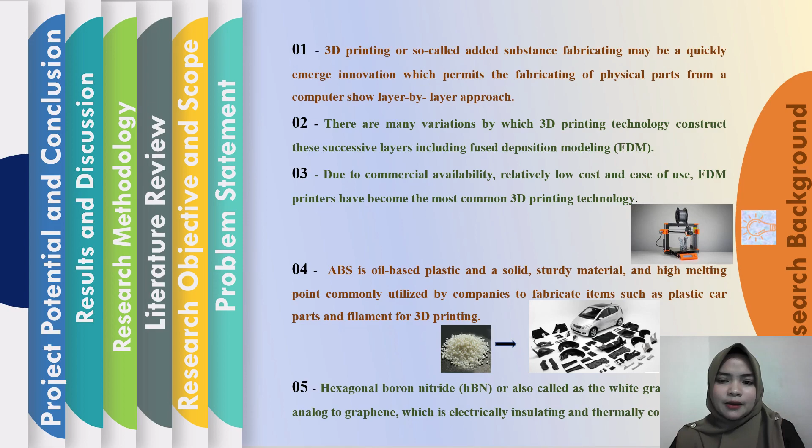Proceeding to the problem statement. For my first problem statement, the warpage issue arises since the primary layer does not adhere well and is peeled away from the printing stage in 3D printing. This is due to the poor adherence of the first layer to the printing platform, according to the previous study from Nazan 2017.

For the second problem statement, there is a challenge in fabricating the composite 3D printing filament, supported by the previous study from Zhang 2017, which found hexagonal boron nitride has high thermal conductivity and non-toxic characterization. From Devaki 2019, acetone should therefore be added to achieve the objective in ABS HBN composite.

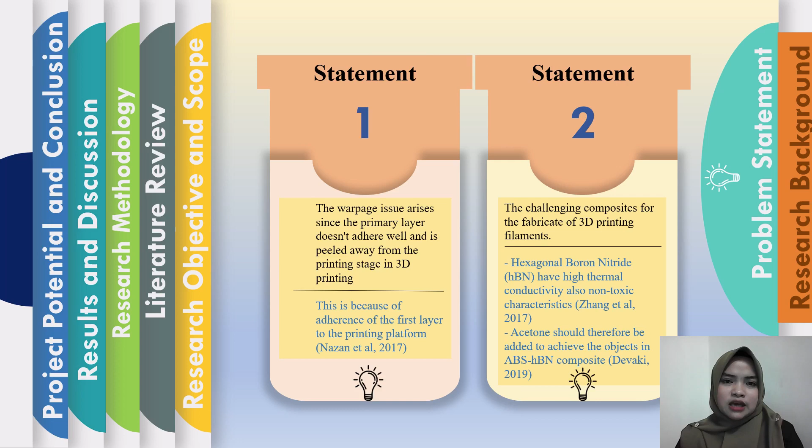For the research objectives and scope, my first objective is to study the effect of material properties of ABS HBN composite and pure ABS on the rheology properties of ABS HBN composite and pure ABS. The second objective is to study the effect of extrusion parameters and material properties on the microstructure of the extruded ABS HBN and pure ABS filament.

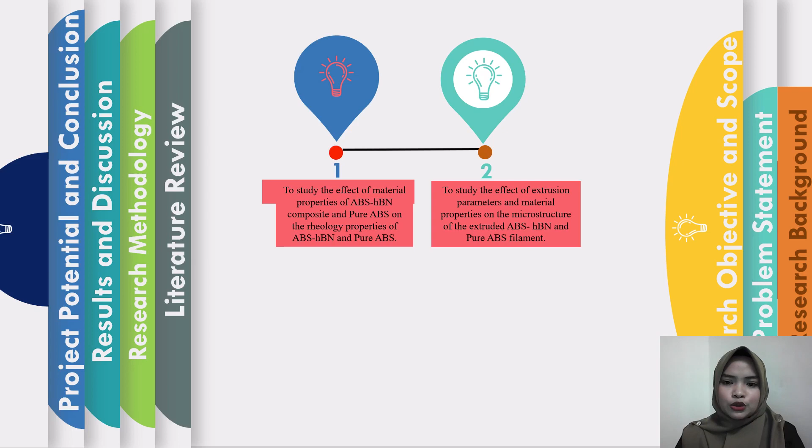For the research scope, this consists of rheology testing and analysis, where the capillary rheometer testing provides us a plot of viscosity versus shear rate and pressure. We also consider several parameters such as load, pressure, and displacement using the test machine to study the effect of extrusion parameters on ABS HBN and pure ABS filament.

This project will deal with the process of polymer filament extrusion, where the molten polymer is pushed into a shaped die through the use of pressure.

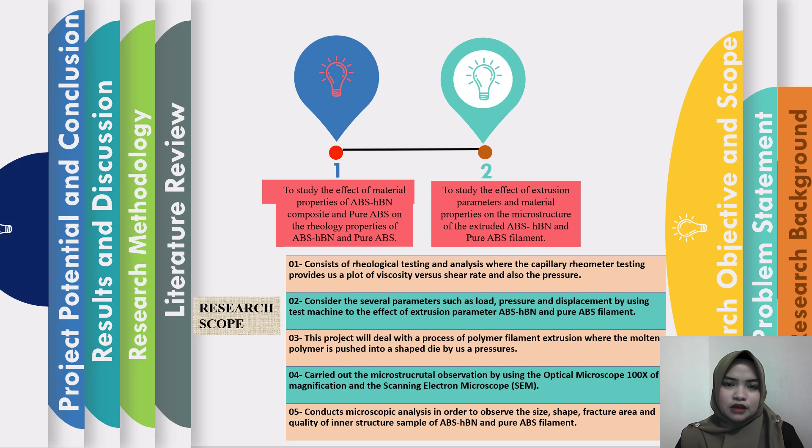We then carry out microstructure observation using two types of microscopy: first, optical microscope with 100x magnification, and also scanning electron microscope (SEM). Then we conduct microscope analysis in order to observe the size, shape, fracture area, and quality of the inner structure of the ABS HBN composite and pure ABS samples.

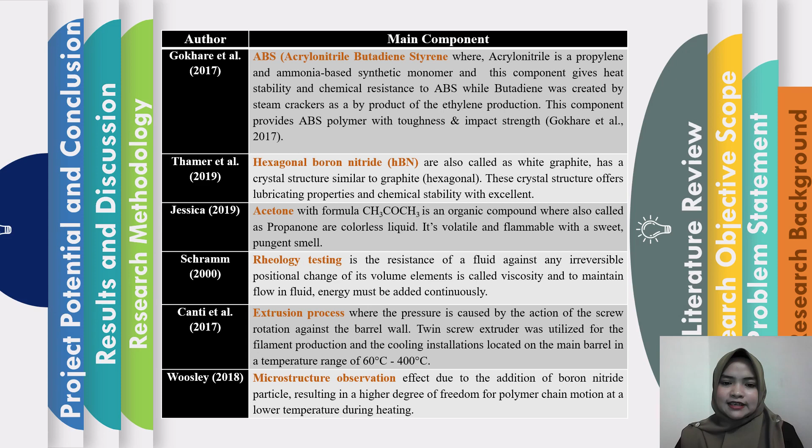For my literature review, I focus more on the main components, which are ABS, hexagonal boron nitride, acetone, rheology testing, extrusion process, and microstructure observation.

For the research methodology, we go through the flowchart of the project, materials, and process first. This is my flowchart of the project, which consists of two objectives that I will bring up next.

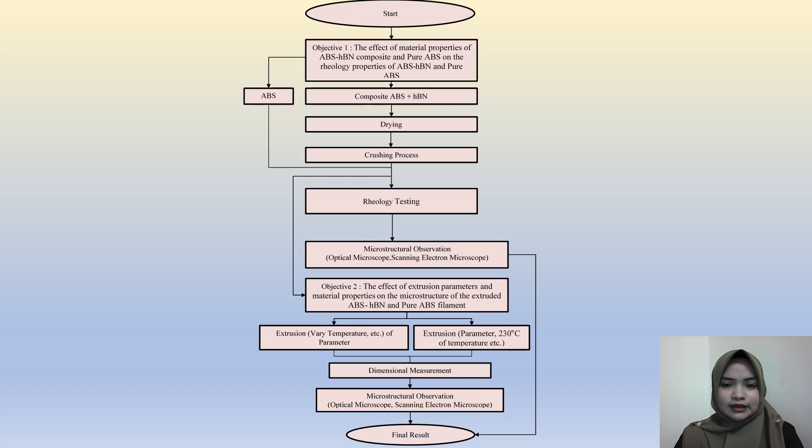For the material, ABS was selected for composite manufacture, especially for creating plastic products such as 3D printing, automotive construction, and electronics, which are important industries for ABS. This is referred from the previous study by Gokhare 2017. ABS will also be dissolved into liquid form, as referenced from the previous study by Devaki 2019.

ABS material is very durable, slightly flexible, and lightweight, which makes it perfect and easily extruded for 3D printing, and suggested printing at 210 to 240 degrees Celsius with an 80 degrees Celsius or higher heated bed. This is from findings by Zachary Hay 2019. ABS is particularly useful for objects requiring flexibility and strong self-bonding among layers, based on Horne 2017.

Refer to Table 6.1. This shows the properties and specifications of ABS resin, with ABS resin data from the CES EduPack software.

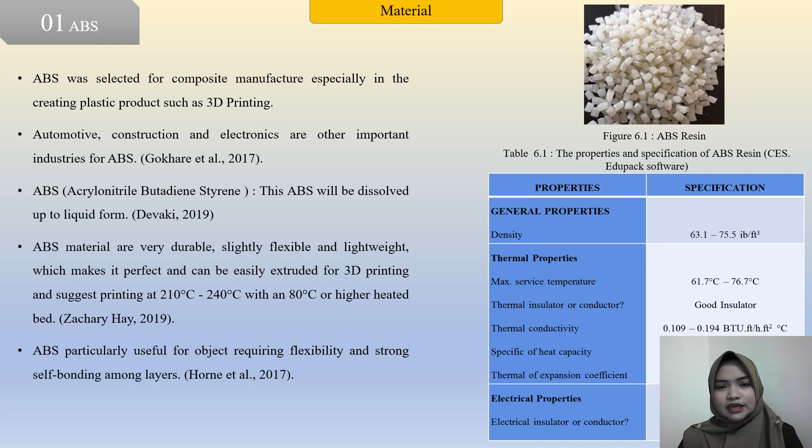That is hexagonal boron nitride, also called white graphite, which has a crystal structure similar to graphite hexagonal. This crystal structure offers lubricating properties and chemical stability with excellent characteristics, from the previous study Thamer 2019. HBN was selected in the manufacture of this composite.

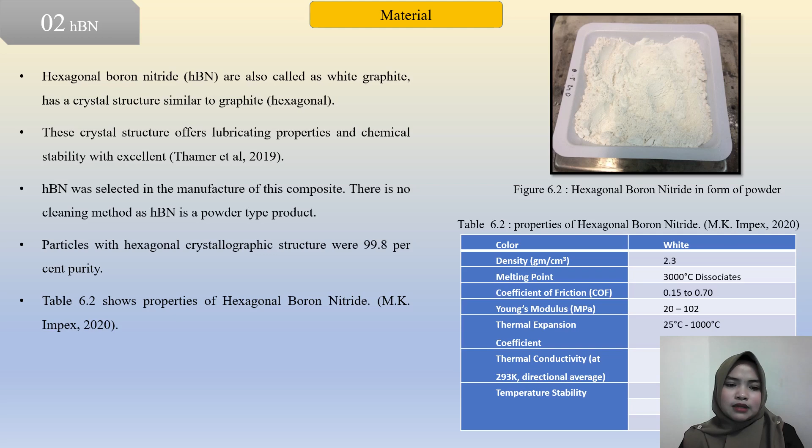There is no cleaning method for HBN because it is in powder form. Particles with hexagonal crystallographic structure were 99.8% purity. Table 6.2 shows properties of hexagonal boron nitride from MK Impex 2020.

Acetone, also identified as CH3COCH3, is a flammable liquid category. Acetone is water miscible and is also a major solvent, usually used for cleaning purposes. But in this project we use acetone as the mixture with ABS HBN to make a strong bonding between that composite. It is volatile and flammable, due to Jessica 2019.

Acetone can also be used to a limited extent for the formulation of nail polish removers and household items like cosmetic and personal care products. Table 6.2 shows physical and chemical properties of acetone from Merck's 2018.

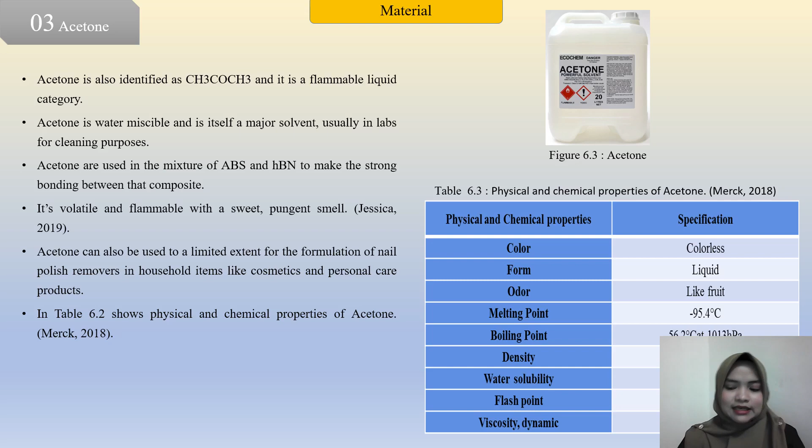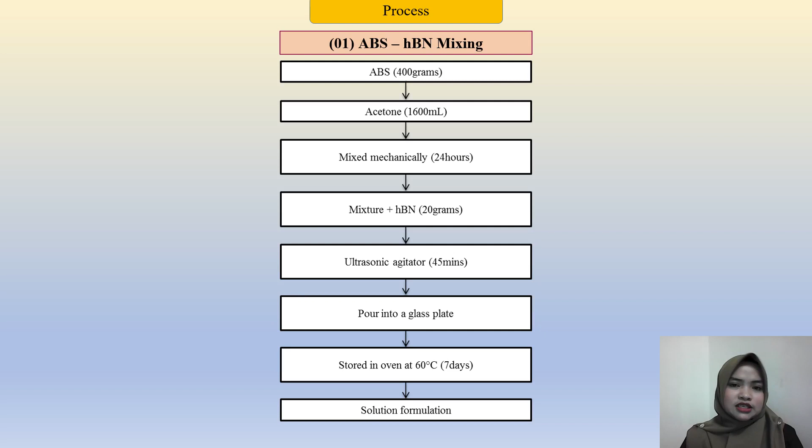Now we proceed to the process. First is ABS HBN mixing. Start with the combination of ABS with acetone, mixed mechanically for about 24 hours, and mix with HBN at 20 grams, then goes to the ultrasonic agitator for about 45 minutes, then pour into a glass plate and store in the oven at about 60 degrees Celsius for 7 days to become a solution formulation.

Then process number 2 is producing the filament of pure ABS and composite ABS-HBN through rheology testing. First, turn on the machine, set the parameters, and wait for the temperature. The parameters set are: barrel diameter about 50 mm, capillary length about 20 mm, temperature set at 230 degrees Celsius, and preheating time at 300 seconds.

After setting the parameters and temperature as desired, we insert the material and run the process, observing the graph and data variation on the computer. When the filament is successfully produced, the graph will show the data as stated in the pictures, with the graph line in green. The green line shows the filament produced from the machine, and then lastly we collect the filament product.

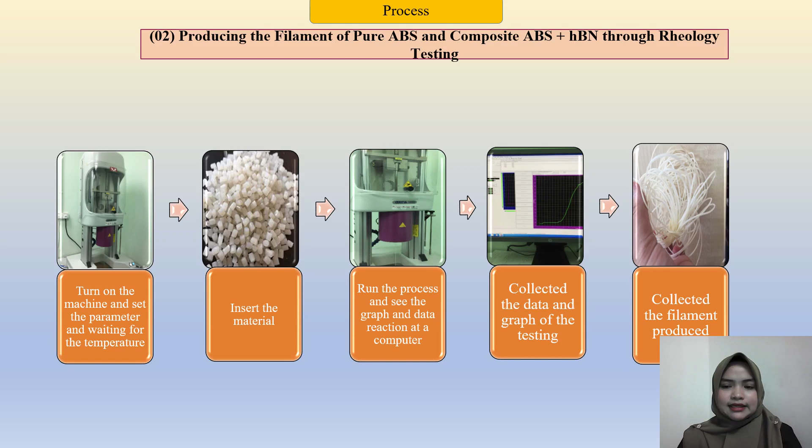Then we proceed to producing the filament of pure ABS composite and ABS HBN through another process: turn on machine number 1, set the parameters and temperature. The temperature set consists of 5 stages, starting with 67 degrees Celsius, then 200 degrees Celsius, followed by 230 degrees Celsius, 230 degrees Celsius, and 220 degrees Celsius, which these parameters need to remain constant.

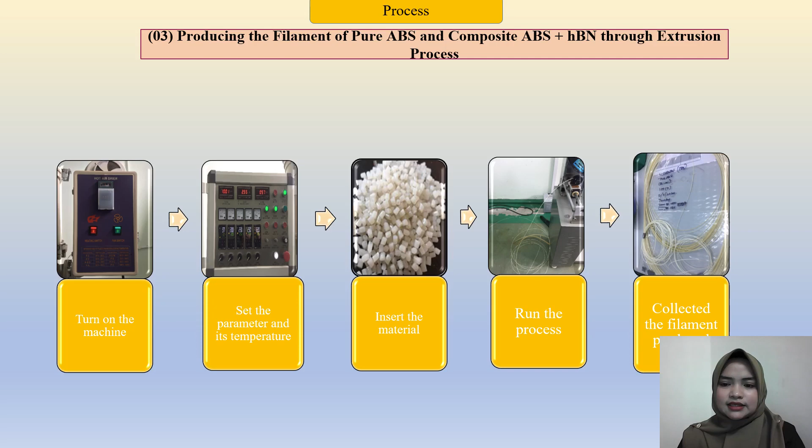Then insert the material, run the process, and collect the filament produced. For the crushing process, the dry composite sheets must be cut into small parts around 5 by 5 mm before crushing. The solution mixture then undergoes a crushing process to get the correct amount. This method uses a Cheso crusher machine to get the desired scale.

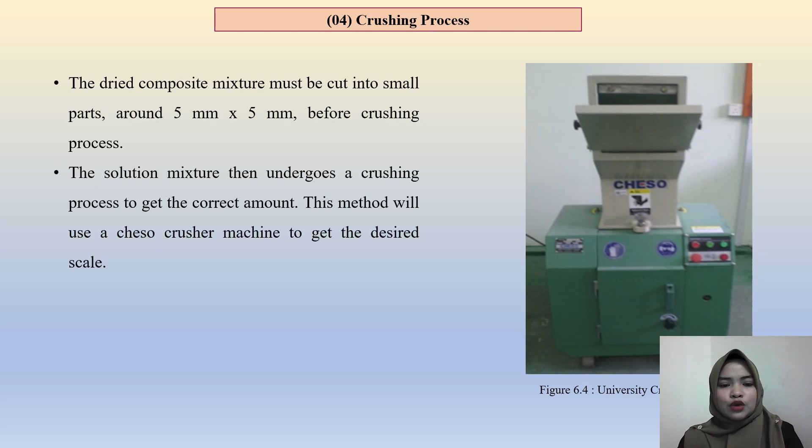For the rheological testing and analysis, the capillary rheometer testing provides a plot of viscosity versus shear rate. The capillary rheometer, Instron CEAST SmartRHEO Series SR20 pattern, is used to measure the viscosity of polymer melts based on the rate of deformation and temperature. The pressure is also studied from this rheology testing.

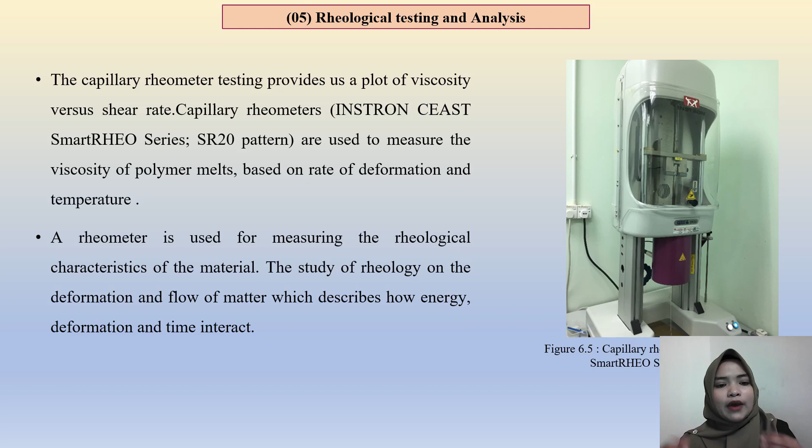A rheometer is used for measuring the rheological characteristics of the ABS HBN composite material and also for the pure ABS. The study of rheology concerns the deformation and flow of matter, describing how energy, deformation, and time interact. Then we proceed to the extrusion.

The process of extrusion is a process carried out where the molten polymer is pushed into a shape die by pressure. The pressure is caused by the action of rotation of the screw against the barrel wall. The machine is operated precisely using several zones: intake, melting, venting, mixing, vacuum, and metering zone.

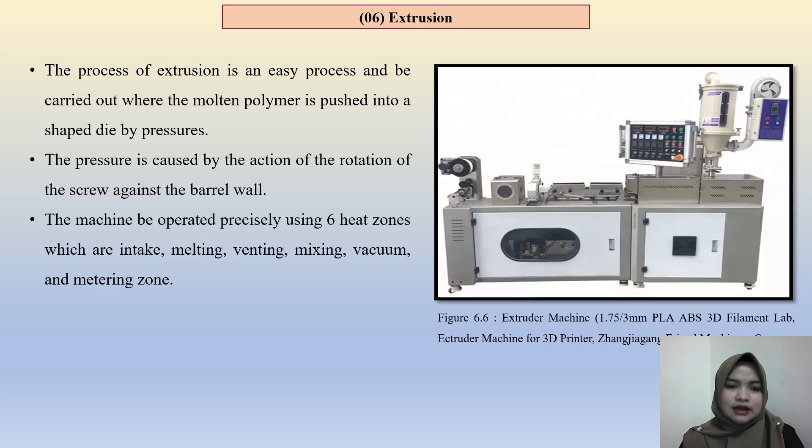Proceeding to the microstructure observation, for which we use two types of machines: one is an optical microscope at 100x magnification, and the second is the scanning electron microscope, SEM. The optical microscope, also known as a light microscope, uses a light and lens combination to magnify an image for viewing tiny objects such as cells.

Optical microscopes are used, though the magnification of this type of microscope is limited, and minimal structure exists in the viewing of a cell.

For the scanning electron microscope, a directed electron beam scans over the sample surface. The electrons in the beam interact with the sample and create different signals to obtain information about topography and composition of the surface. The aim of the observation is to see the properties of the material for ABS and HBN, where the mixing of HBN into ABS will affect the structure of the ABS-HBN microstructure. The rheology testing and extrusion process also give an effect to the microstructure of the material.

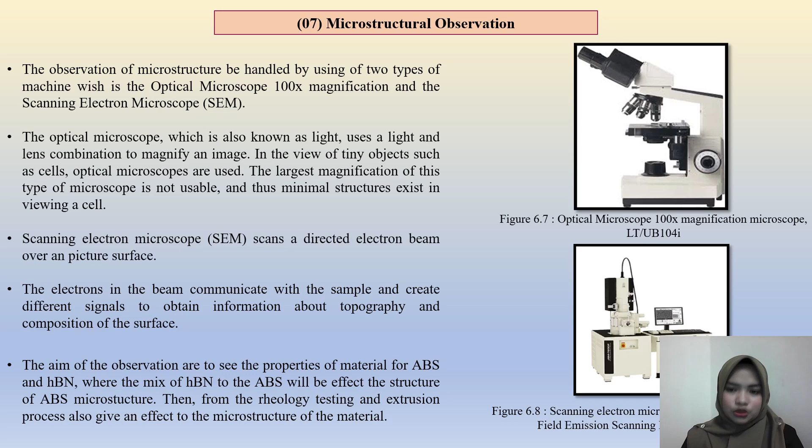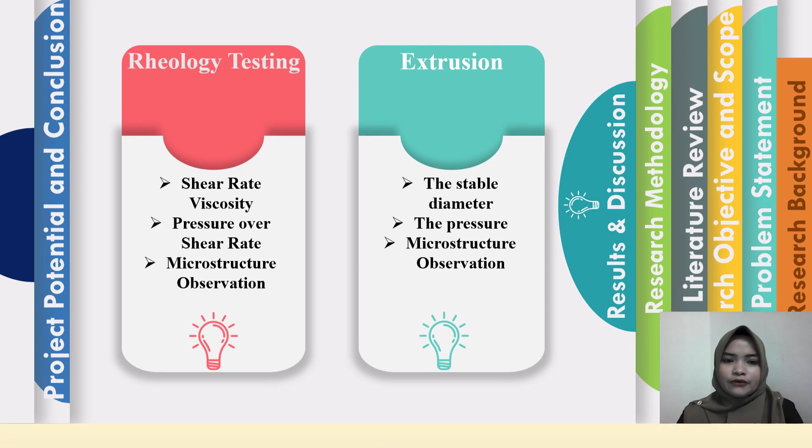Then we proceed to the results and discussion, which consist of two types: rheology testing and extrusion. We go first to the rheology testing of pure ABS and composite ABS HBN, looking at shear rate versus viscosity.

The results show the viscosity decreasing with increasing shear rate, which generally decreases with increasing temperature. The increase in intermolecular interactions is connected with the amount of free volume available to the molecular chain. As temperature rises, the composite ABS HBN material had higher viscosity.

The viscosity reached 234.5 pascal-seconds compared to pure ABS, due to the high flow resistance and the molecular structure, which gives a lot of internal friction among the composite material.

This result does not match a previous study's findings, where the higher viscosity value was stated for pure ABS, by Devaki 2019. I think this is because the composite ABS HBN that I used for my project was already stored for about 1 year, so I think the material properties had already changed, maybe due to temperature.

This caused the different result that I got compared to the previous study.

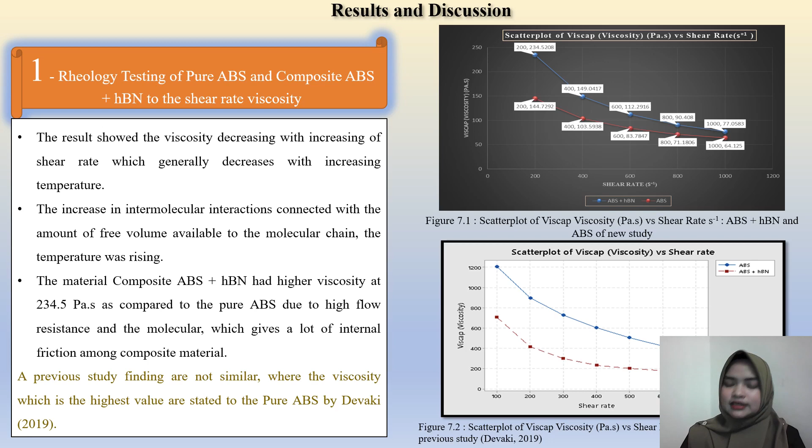Then we proceed to the second one: rheology testing of pure ABS and composite ABS HBN for shear rate versus pressure. The results show increasing pressure for both pure ABS and composite with increasing shear rate, giving an increase in stress pressure in the solid state.

The pressure increase affects the molecular force of attraction between molecules, which leads to a decrease in viscosity. The ability to resist wear due to contact with another surface means that composite ABS HBN shows higher pressure than pure ABS.

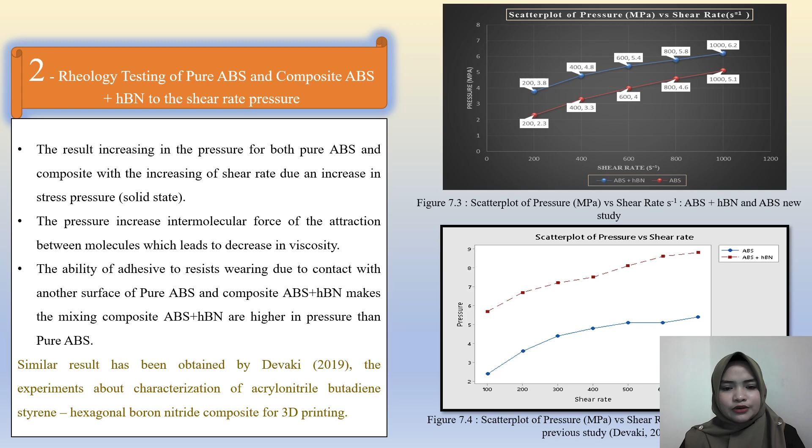Similar results have been obtained by Devaki 2019, in the experiment about characterization of acrylonitrile butadiene styrene hexagonal boron nitride composite for 3D printing.

Then for the third, extrusion of pure ABS and composite ABS HBN: the results show that the screw speed parameter, RPM, must be adjusted to a higher speed, so the product produced is thin and can be processed in the 3D printing process.

The diameter for pure ABS was stable during the process, around 1.75 to 1.80 mm, less than composite ABS HBN, which was around 1.83 to 1.86 mm, as shown in figure 7.5 and figure 7.6.

The pressure only increases in the direction of flow, and the density of the material is constant. The screw barrel also plays an important role, as the screw barrel system is at the heart of the extrusion process and determines its performance.

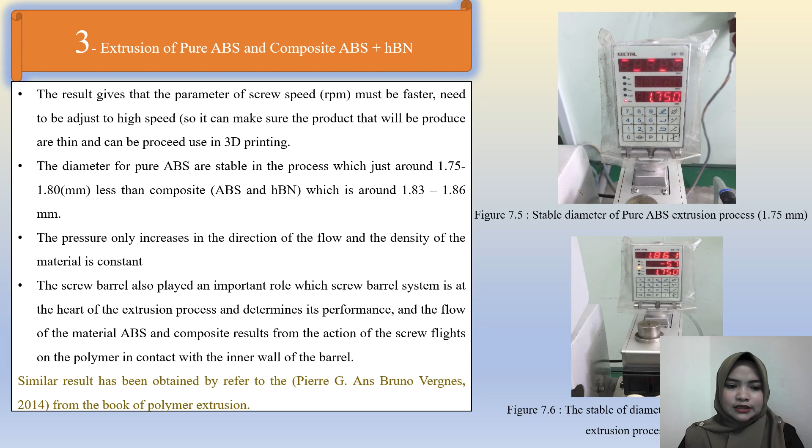The flow of the ABS and HBN material results from the action of the screw flights on the polymer in contact with the inner wall of the barrel. Similar results have been obtained by referring to Pierre G. and Bruno Vergnes, 2014, from the book Polymer Extrusion.

Then for number 4, microstructure observation using an optical microscope on the filament from rheology testing of pure ABS and composite. The results show 20x magnification, where the fracture affects the structure of the sample at the dark side.

This side needs the highest lens to clearly see the microstructure or the fracture effect, and it is the part that is more inside, as compared to the light side.

The structure isn't too good at the head, which also combines with the parameter issue, since the rheology tests aren't stable at the beginning, because at the start of the process we need to wait for the perfect parameter that we want.

The surface of the microstructure at the tail of the sample is better than at the head part, which is not as affected on that side.

We see more of the fracture structure at the head. The microstructure of the composite shows good interfacial bonding between ABS and HBN.

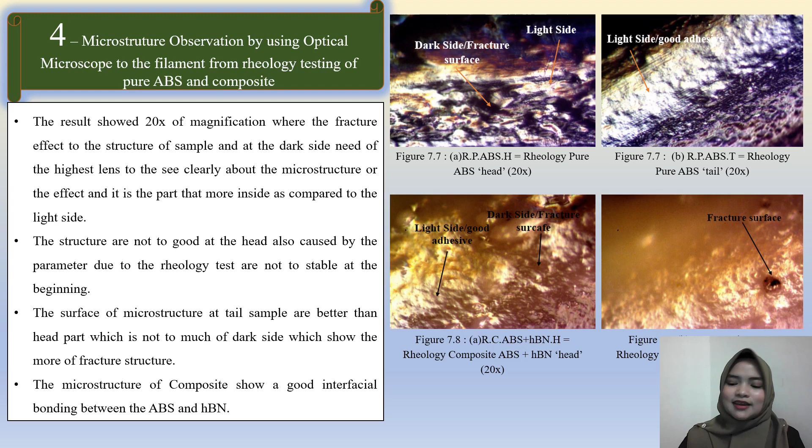Then for number 5, microstructure observation using an optical microscope on the filament from the extrusion process of pure ABS and composite. The results show at 20x magnification that the microstructure is too rough at the head for pure ABS and easy to break, or ductile.

Ductile failure refers to a highly ductile material, in which the material pulls apart instead of breaking, due to the unstable parameter at the beginning of the extrusion process.

Generally, filament extrusion resulted in poor quality material, porous microstructure, severely weak mechanical properties, and inconsistent printability.

But in the microstructure observation of the composite sample, the surface is very smooth for both head and tail. This is caused by the combination of ABS and HBN, which forms strong bonding with each other.

This finding is consistent with research by Worsley 2018, where a similar result on the microstructure was found.

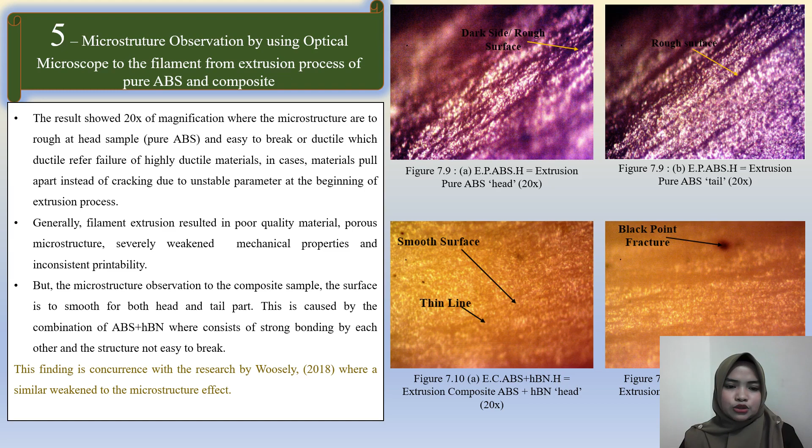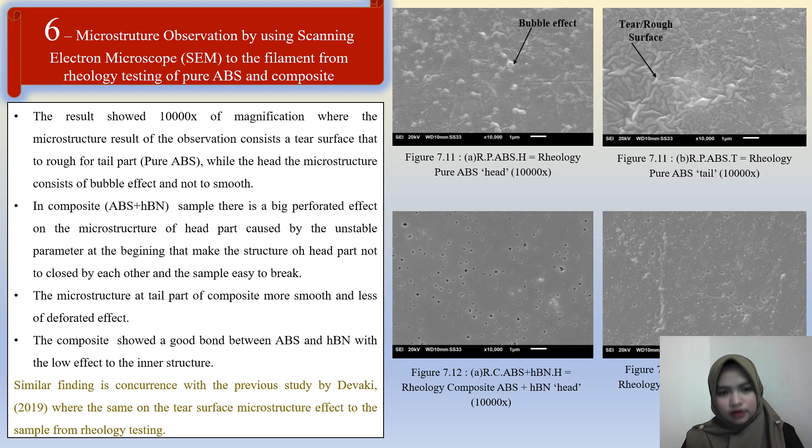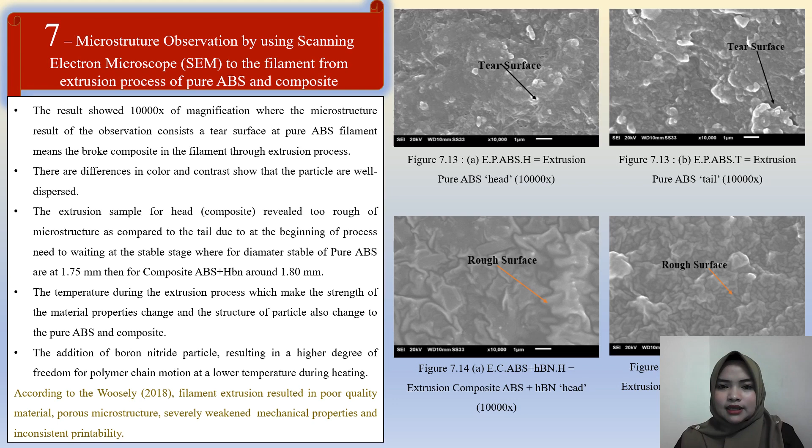Then next is the project potential. First, the study findings could be applied in the 3D printing industry. The unique combination provided by the composite ABS HBN material makes it desirable for heat dissipation and packaging applications in electronics. This is due to the high thermal conductivity of the composite. This is also supported by the previous study from Shahriar 2015.

Then the second one is high temperature projects. ABS has a higher tolerance for heat compared to other plastics, making 3D printed ABS objects useful in environments where the part encounters relatively high temperatures, such as inside cars or around cooking equipment.

Then the third one is that parts inside cars and cooking equipment are widely used in the community, and the industry is highly rapid in producing the equipment. This can also lower cost, give the best quality to the product, and sustain the ecosystem with less consumption of resources. Less consumption of resources makes the ecosystem stable.